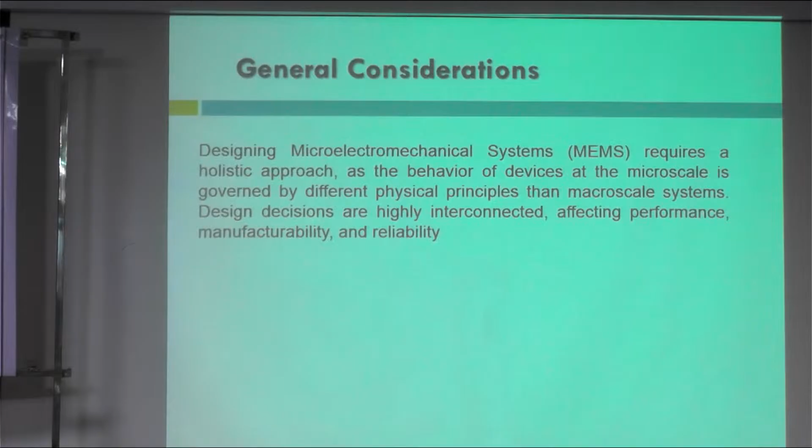As discussed previously, we know that at the micro scale or nanoscale, Newtonian mechanics does not function as we understand it at the macro scale. So if we do not consider this accordingly, we won't get the intended performance of the device, because some properties of the material change at the micro scale. We don't get the exact property as at the macro scale, so the intended device performance won't be obtained.

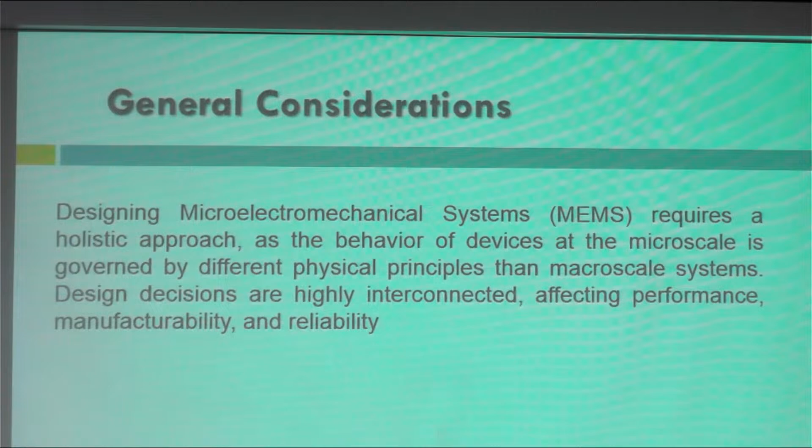So then we have to look firstly at material selection. The choice of materials fundamentally dictates a device's performance, fabrication process, and reliability. Just now we had a look into silicon itself. Silicon is the most common MEMS material due to its well-established fabrication process inherited from the semiconductor industry.

It is lightweight, has excellent mechanical properties, is elastic, has no creep below 800 degrees Celsius, and allows for integration of electronics on the same substrate. I think I've been talking about making a circuit design on top of the silicon substrate, so this is the meaning here - the integration of the electronics or electrical circuitry on the substrate itself is important.

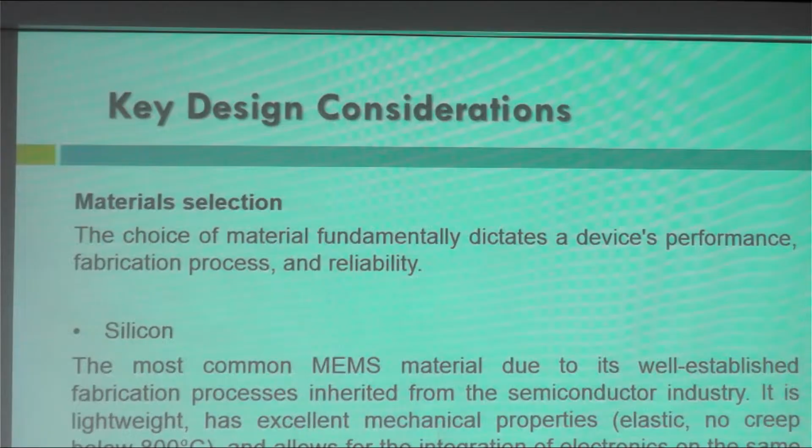We know that in other devices, in macro scale devices, we can have electric circuitry with wired winding on the device, or with an electronic circuit outside of the device, etc. But for micro scale devices, we need to layer the electrical circuit on the surface, because we want to maintain the small structure and make it accessible for the small places in our intended application.

Single silicon crystal is highly stable but anisotropic, with properties that vary based on crystal orientation. And polysilicon is a versatile material used for structural layers in surface micromachining; its properties depend on deposition condition.

For metals, used for electrical interconnects - we have discussed this - high aspect ratio structures. High aspect ratio meaning you have long-standing materials, so the width and the length are pretty much different in terms of size. That is the meaning of high aspect ratio. Properties like residual stress and adhesion are critical considerations for metal thin films.

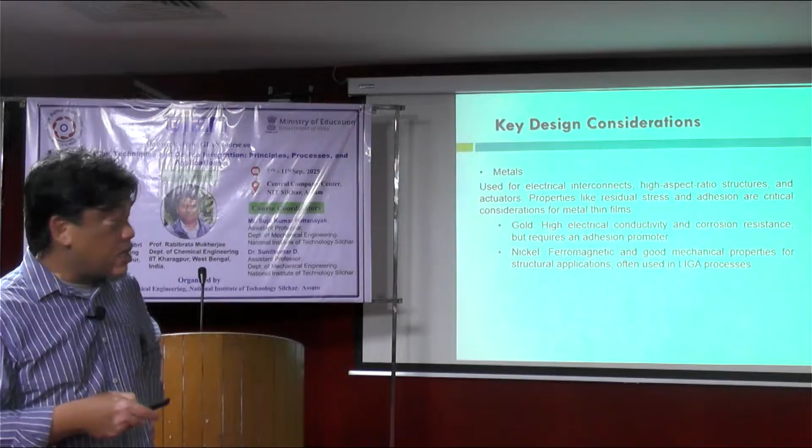For example, gold has high electrical conductivity and is corrosion resistant, but requires an adhesion promoter. We have discussed it - if we use chromium, for example, we can get high adhesion with the surface. And nickel is ferromagnetic with good mechanical properties for structural application, often used in the LIGA process.

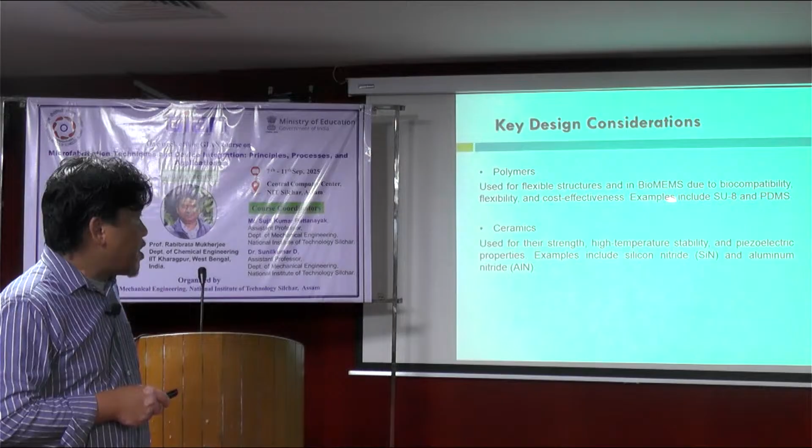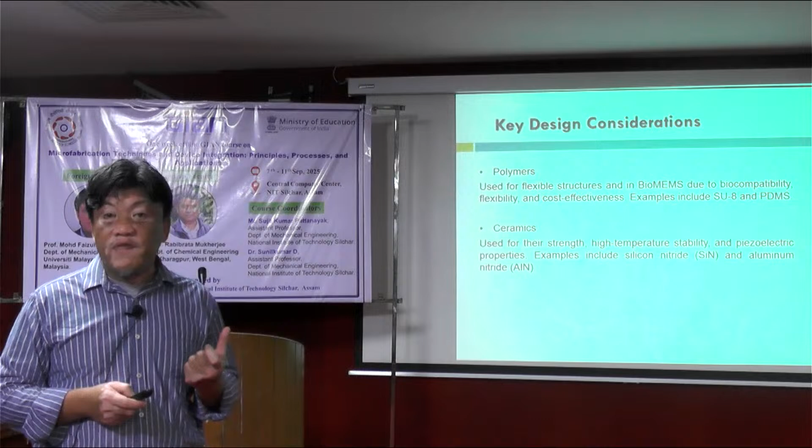Polymers are used for flexible structures and in bioMEMS due to biocompatibility, flexibility, and cost effectiveness. Examples of polymers are SU8 and PDMS - quite common materials in MEMS and bioMEMS applications. You can make a structural design using this kind of material because of its high viscosity. And ceramics are used for their strength, high temperature stability, and piezoelectric properties.

Piezoelectric properties for ceramics, for example PZT, lead zirconate titanate. Examples also include silicon nitride and aluminum nitride.

Then another consideration, which we have gone through in a previous class, is the scaling laws. Again, when we design something at the micro scale - I keep mentioning this - at the micro scale, physical phenomena scale differently with size, meaning the design cannot simply be scaled down from the macro world. If you think that at the macro world you design something, then just shrink the size and it will work accordingly as at the macro world, you are wrong, basically.

So you have to maybe alter the design and consider different materials in order to make it work, because the property will change significantly when you scale down to a different size.

Surface to volume ratio: as devices shrink, surface area dependent forces such as friction, adhesion, and surface tension become dominant over volume dependent forces like inertia, mass, and weight. This is critical for actuators, microfluidics, and heat transfer.

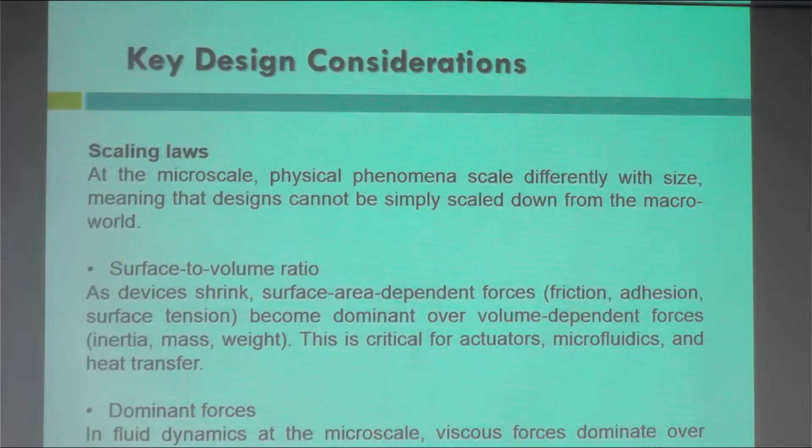For thermal properties, you need to consider heat dissipation, which is surface area dependent and becomes more efficient at smaller scale, relative to heat storage, which is volume dependent. This can influence the design of thermally actuated devices.

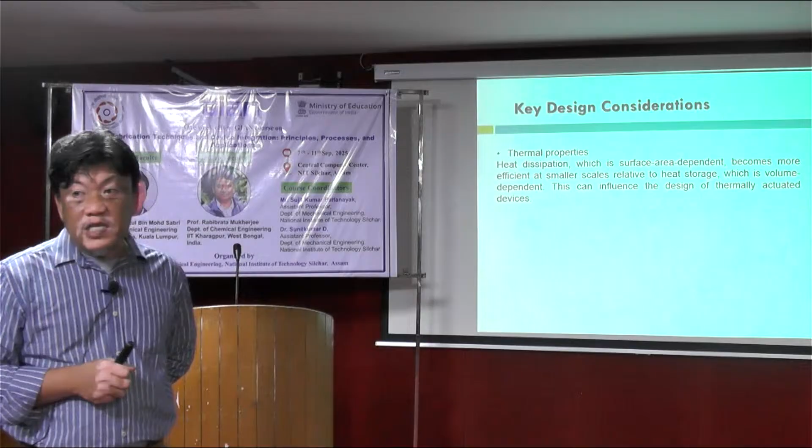For example, when I showed you yesterday the use of inkjet printing of liquid with a thermally actuated actuator - if it's very small, you can heat up the materials quite fast. So the time to deform the material at a faster rate will make it possible for you to use a high frequency inkjet printer.

But the thing is, at the small scale, you can heat up something quite fast, but the heat will also disperse quite fast as well. So that is something that needs to be considered in the design related to thermal properties of the material.

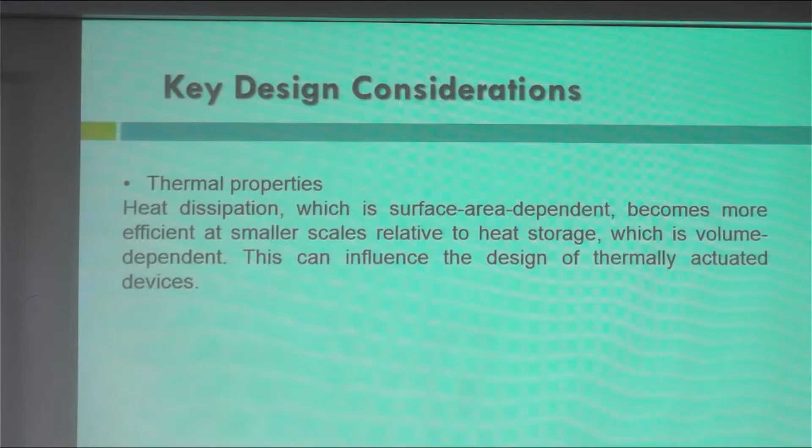Stress and stiction are major reliability challenges in MEMS that must be addressed during design. The stress to the structure is different, and stiction means it tends to attach to the surface - it sticks. You know that if something is very small, it easily sticks to the surface of a material, so stiction prevents things from moving. That is part of what you need to consider when you design a very small device or structure.

Residual stress - internal stress remaining in a film after fabrication - can cause warping, cracking, or buckling, altering device performance and reliability. As I mentioned in the previous lecture, residual stress is related to fabrication process parameters as well. If you want to reduce or mitigate residual stress, you can look into design techniques, including using corrugated beams or incorporating features that relieve stress, and process optimization, such as controlling deposition parameters.

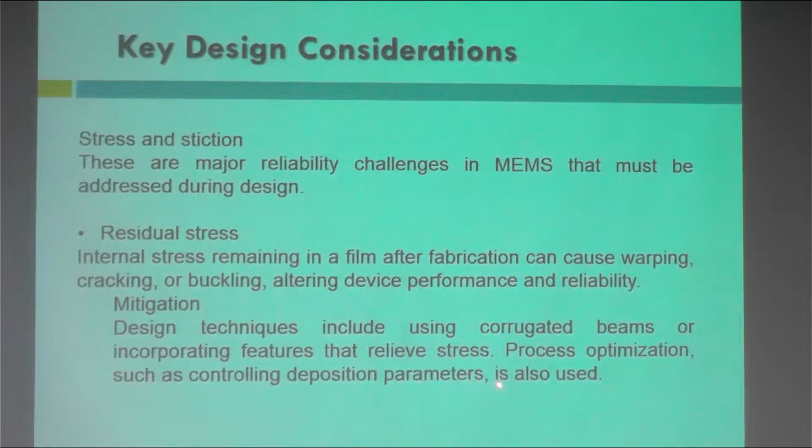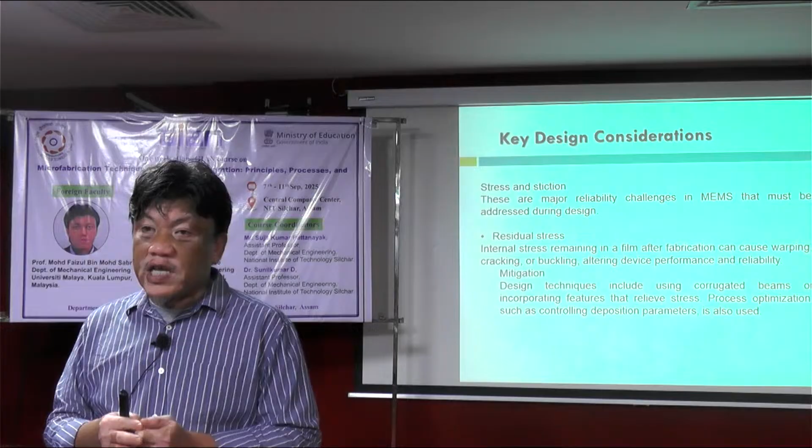As I've mentioned before, we try to establish this as a kind of recipe already, or if it's a new process, we need to identify or try to optimize the process itself in order to get low residual stress materials or an acceptable level of residual stress in the material.

Stiction is the unwanted adhesion of released microstructures to the substrate or other parts due to surface forces. It is a primary cause of device failure. When stiction happens, an actuator may not be able to release something from the surface because it's stuck, or basically glued, to the surface. That is something we have to prevent.

Mitigation strategies include surface modification, such as applying anti-stiction coatings like hydrophobic monolayers, which can reduce surface energy and adhesive forces. Surface texturing, increasing surface roughness, reduces the contact area between components and thereby reduces stiction. Mechanical design, incorporating spring-like structures or bump stops, can prevent stiction upon contact.

Let's say you have an actuator that forces something toward a certain surface, but at a certain extent, when it touches, the spring property of the material allows it to return to its original position. That is one possible strategy in terms of mechanical design.

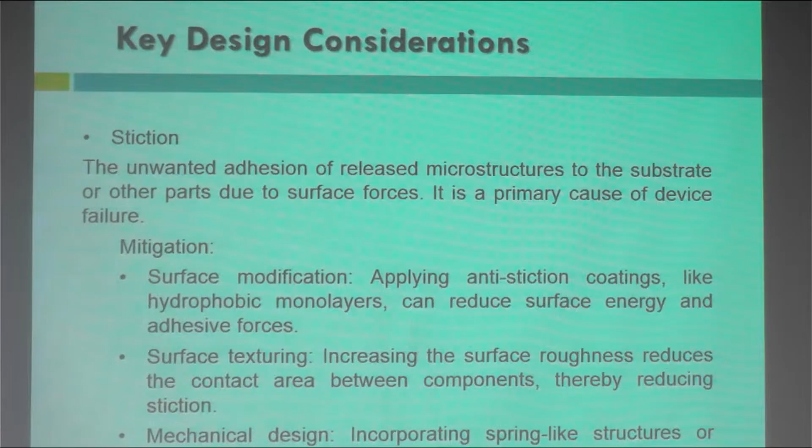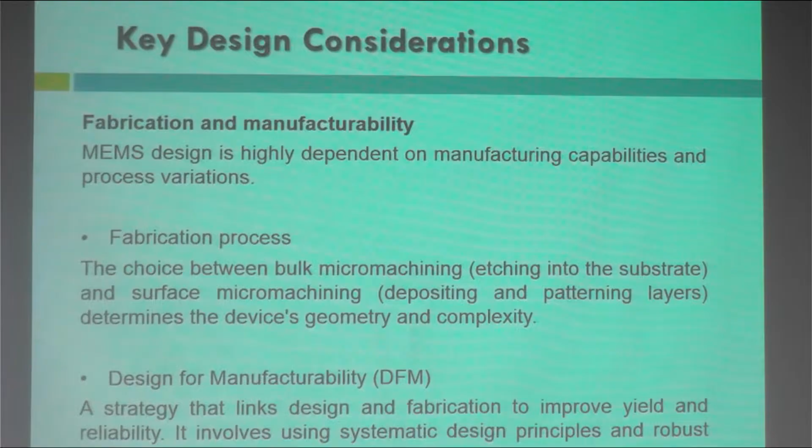And another key consideration is fabrication and manufacturability. So how easy you can fabricate, how difficult it will be if you choose certain design or certain materials. So MEMS design is highly dependent on manufacturing capabilities and process variation. So in MEMS design, basically you have a number of processes that are already established within the use of semiconductor. So you try to use these processes as far as you can in order to prevent unnecessary hassle.

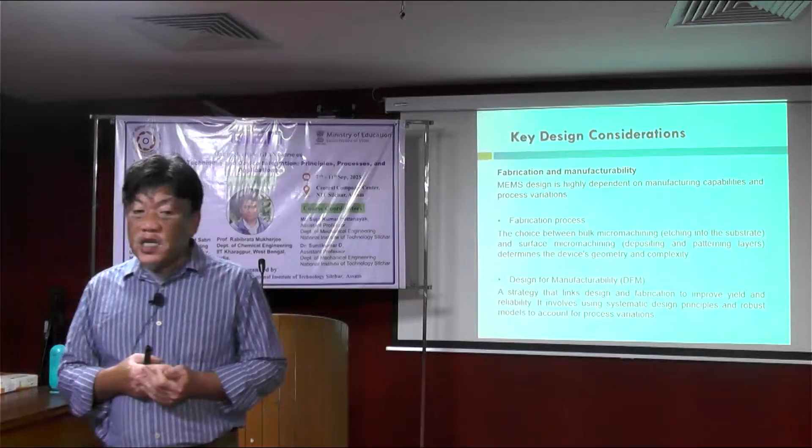In the machining process, for example, you use forces in removing materials. Let's say you do drilling, you do cutting using a lathe, for example. But for MEMS processes at the small scale, we can say that MEMS devices are fragile in comparison with macro scale devices. So you want to avoid the application of forces to the materials as much as you can. So you want to stick with the processes already established within the semiconductor process in order to make sure that you can fabricate the device successfully.

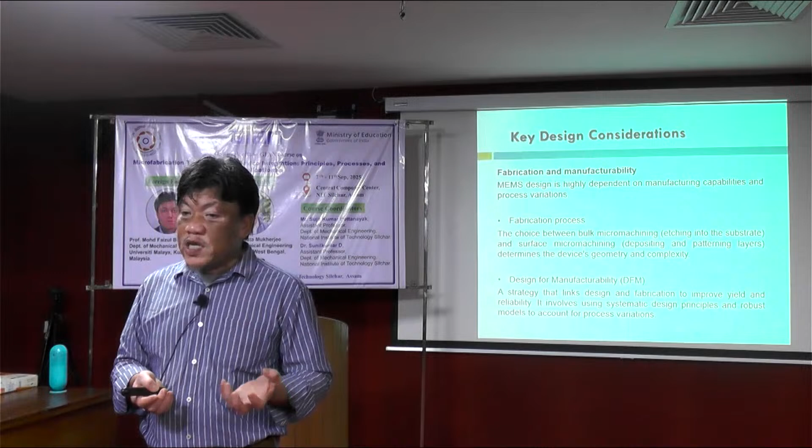So fabrication process, I mean, once we design the micro devices, we have to have in mind the process flow, what to do and how to create what kind of structure. So that will make sure that the device will go through the semiconductor process which is already established, without going into, let's say, mechanical processes of drilling, etc.

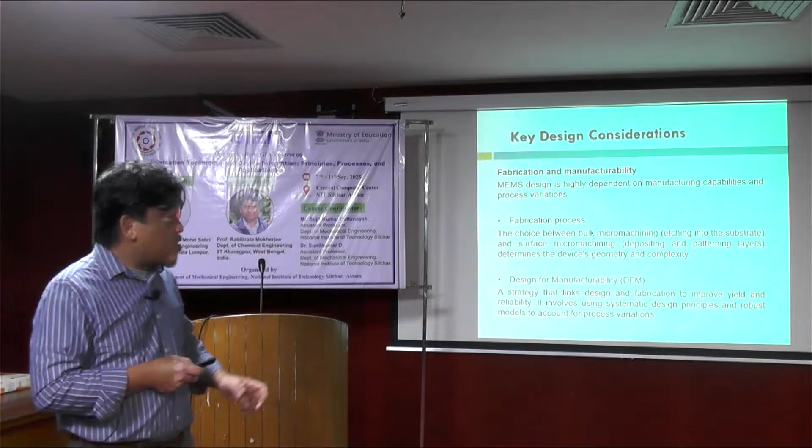So fabrication process: the choice between bulk micromachining, etching into the substrate, for example, and surface micromachining, depositing and patterning layers, determines the device geometry and complexity. Because it's small scale, it's always complex devices. You cannot simply handle the microstructure by hand, you need to handle with care. In terms of process, most of the time we need to see under the microscope because of its small structure. So the naked eye will be difficult.

So that's where you need to design accordingly, since even the structural design can be difficult for you to fabricate, basically because the origin of the MEMS process is the semiconductor process, which is surface micromachining, or 2D. So design for manufacturing is part of the consideration, a strategy that links design and fabrication to improve yield and reliability. It involves using systematic design principles and robust models to account for process variation. Sometimes certain processes do not work, and you may need to redesign your process steps in order to obtain a certain structure.

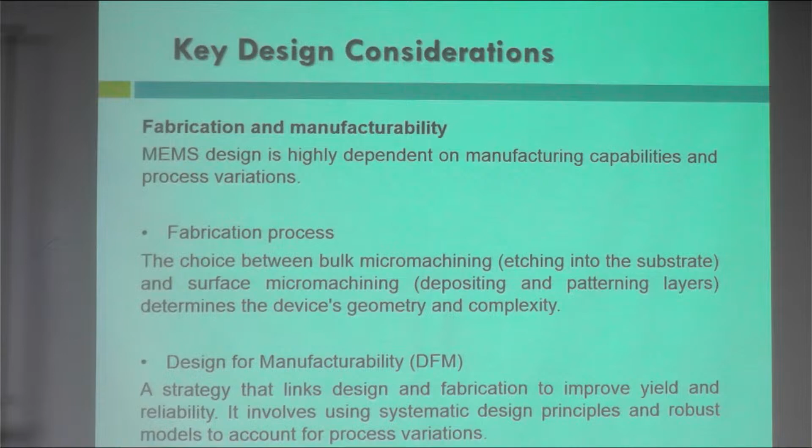So process imperfections and manufacturing tolerances, such as variation in beam thickness or photolithography alignment, can impact device performance. Designers must model these imperfections to predict their effects. By design, let's say we want to produce a 50 micrometer thickness of beam. But in the process, we have to go through masking, etc. The process parameters are sometimes not as accurate as we want, so we cannot obtain the size as intended. The 50 micrometer might be 40, less than what we want, or it might be bigger, maybe 60 micrometer thickness of the beam. So we have to consider this kind of variation when we design something.

But sometimes the process is well established. We know that if we want to obtain the size of 50 micrometer, we have to design the process flow, the masking, etc., slightly bigger. For example, if you want a final beam size of 50 micrometer, you make your photo mask design like 55 micrometer, slightly bigger. That might be something an experienced MEMS fabricator can do.

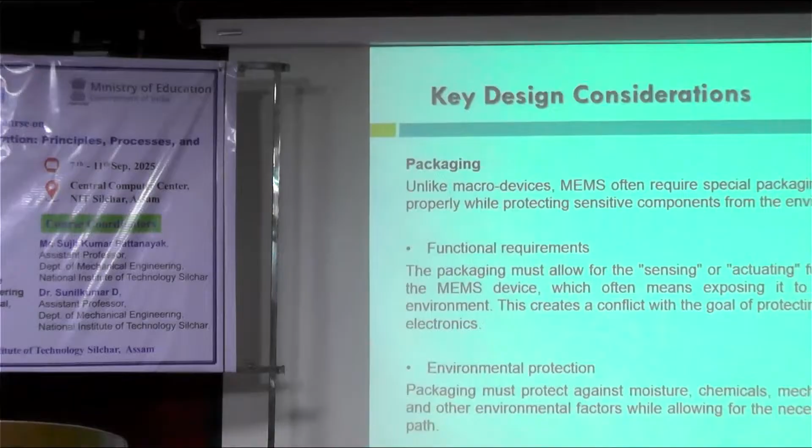You want to protect it from shock, you want to protect it from the environment, for example. I mean, to protect it from even dust, you need to have proper packaging. Functional requirement: the packaging must allow for the sensing or actuating functionality of the MEMS device, which often means exposing it to the external environment. This creates a conflict with the goal of protecting the internal electronics. So this kind of trade-off you have to consider.

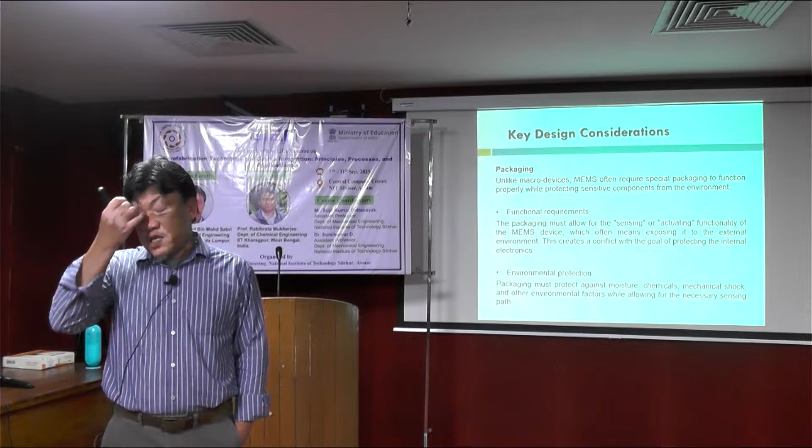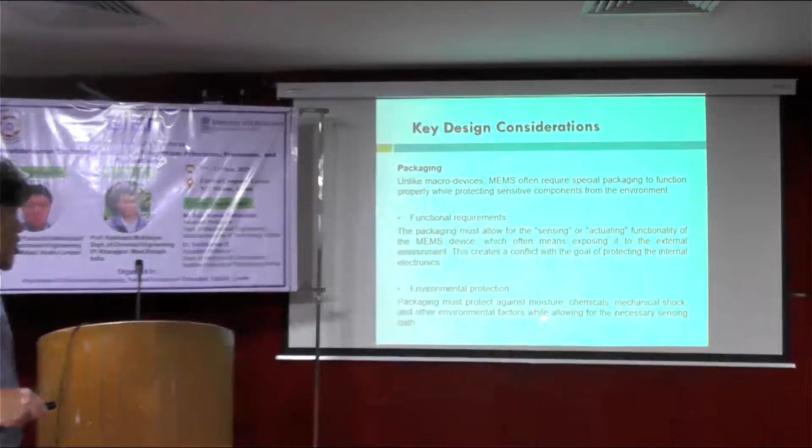You want it to function. Let's say your MEMS speaker, for example: some parts need to be exposed so that it will behave like a speaker and you can hear the voice, but to a certain extent some of the small parts you need to protect with the packaging. So that kind of thing needs to be considered. And environmental protection: packaging must protect against moisture, chemicals, mechanical shock, and other environmental factors while allowing for the necessary sensing path.

Another design consideration is the material properties. We have been talking about this as well. Coefficient of thermal expansion: a mismatch between the MEMS die and package material can induce significant mechanical stress and affect performance. Material selection for packaging must minimize this mismatch. So you have different materials. Let's say your packaging is something like polymer. Polymer does not expand that much. And some parts of your MEMS device might use certain metals as the structure, for example. The expansion of the metals is higher with temperature.

So this mismatch of thermal expansion will create stress to the packaging and to the microstructure of the device itself. So this kind of material mismatch in terms of thermal properties needs to be considered: how you can release it or make sure it won't break when it happens, or operate in a controlled environment. And package types: options range from standard, cost-effective, full mold packages for consumer products to more stable, higher performance cavity or hermetic packages.

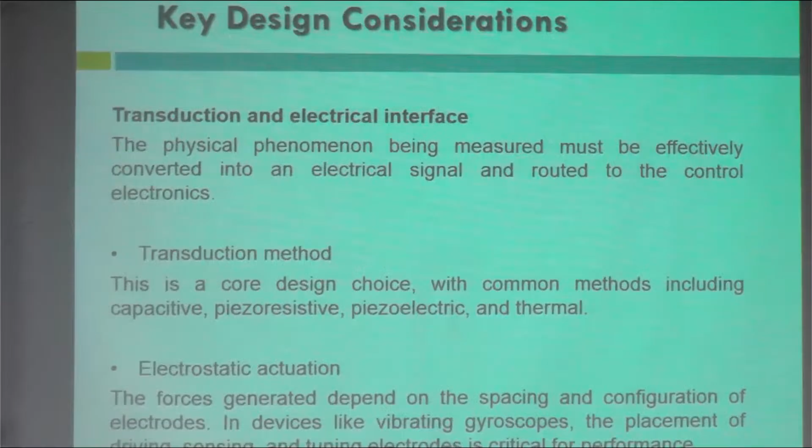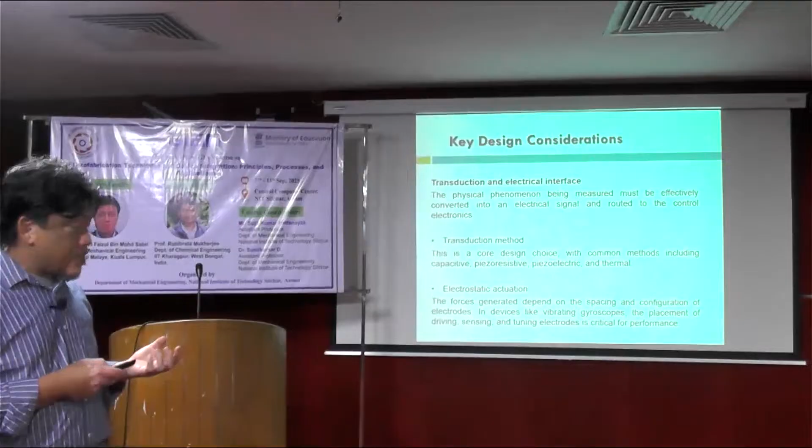Then another key consideration for the design is the actuator itself. The transduction and electrical interface: the physical phenomenon being measured must be effectively converted into an electrical signal and routed to the control electronics. So basically in a MEMS device you need to have things that move, depending on the application. If it's a sensor, you need a sensing part that can change its property or respond to what you want to sense, whether it's heat, light, or humidity. Then you have to consider the phenomena and the electronics accordingly. For example, transduction method is a core design choice, with common methods including capacitive, piezoresistive, piezoelectric, and thermal.

So the transducer or actuator normally used in MEMS is the capacitive sensor or capacitive transducer. It can work both ways, depending on the application, whether you want to use capacitive as a sensor or as an actuator. If you want to move something, it becomes an actuator. But if you want to sense a movement with capacitive, you can measure how much is moved. It's the same with piezoresistive, piezoelectric, and thermal.

We know that piezoelectric has a sensing property. When you provide electrical current to the piezoelectric material, you get expansion, so the material expands and becomes an actuator. But if you apply strain to the material, you get electricity for sensing, because it induces electricity. It's the same with thermal.

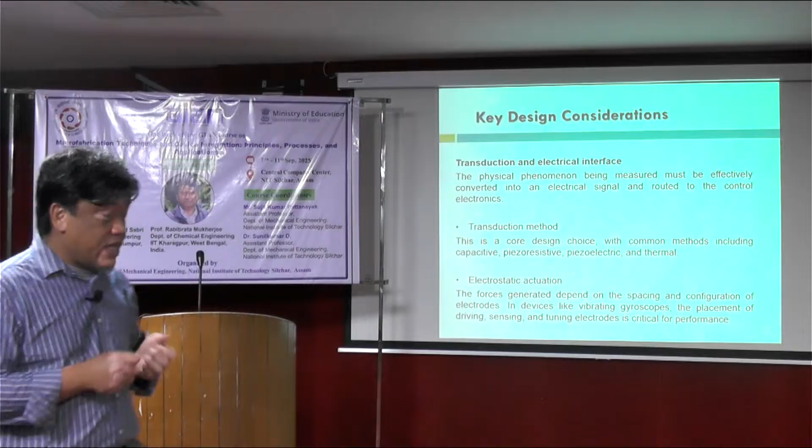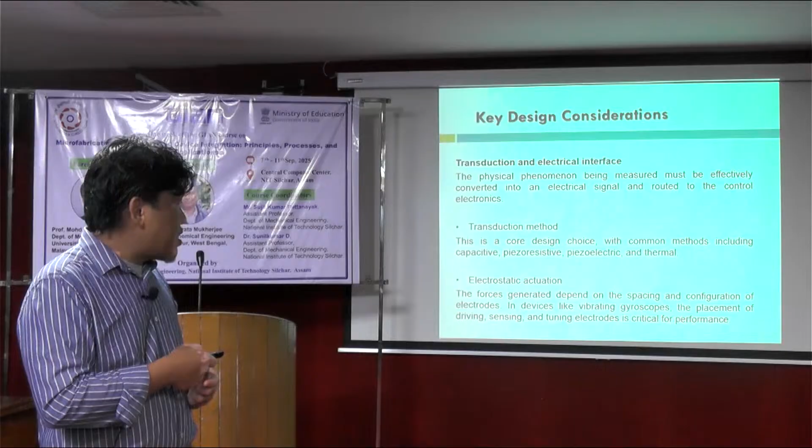Electrostatic actuation: the forces generated depend on the spacing and configuration of electrodes. In devices like a vibrating gyroscope, the placement of driving, sensing, and tuning electrodes is critical for performance. I think we had a look yesterday at electrostatic actuation and some examples of the comb drive actuator, right? A comb drive is basically an electrostatic actuator. With a comb drive you can have different configurations for getting the electrostatic forces. If you integrate more comb electrodes, you can get higher forces.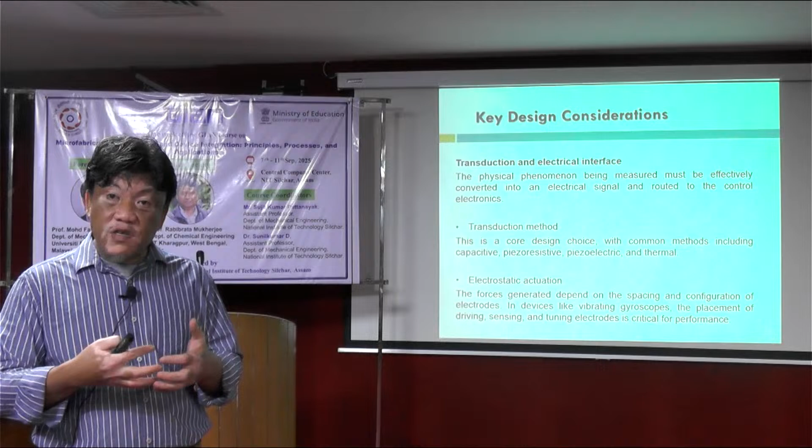And signal integrity: the electrical interface must be designed to minimize noise and interference, especially for highly sensitive analog and digital MEMS signals.

So this is an example of a design consideration. We had a look at the general design considerations for micro devices; next is the example. So let's say you want to have this kind of pressure sensor. You have a layer of thin film here. This is a bulk substrate, kind of anchor. So you have the change of pressure from here, from the bottom.

So when the pressure changes, this thin layer is the place where you want to sense what has changed. So with the change, the deformation of this thin film, you want to have a signal. Basically, you can use piezoresistive or thermal or anything related. Let's say you use piezoelectric, for example: the deformation of this layer will cause some electric current to flow. Then, depending on the calibration, you can sense the pressure, what happened inside if the pressure changes.

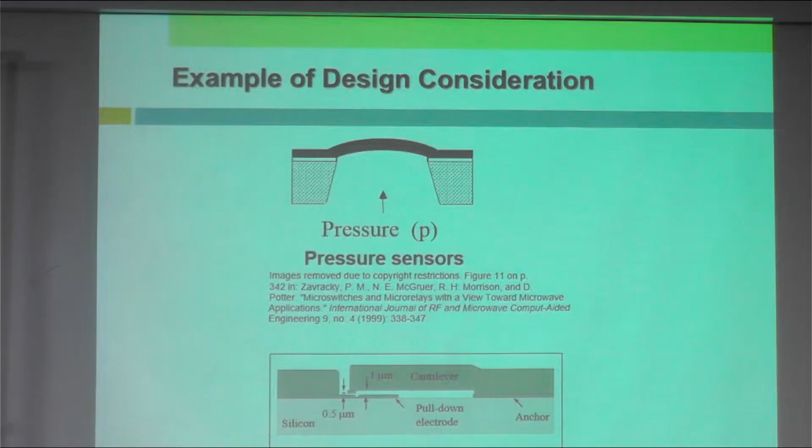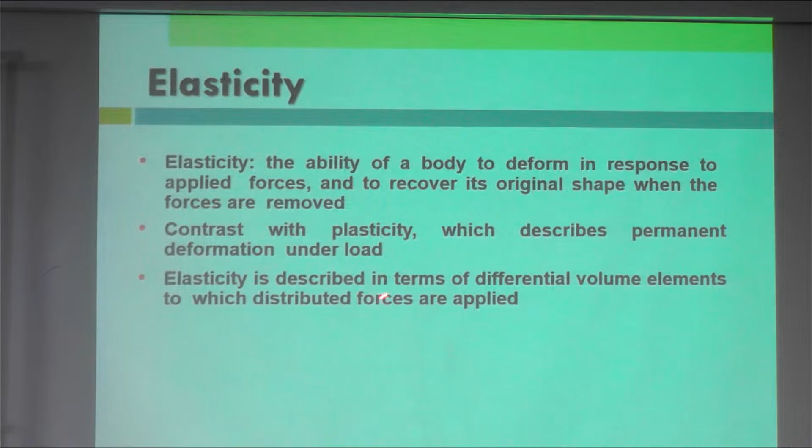And contrast this with plasticity, which describes permanent deformation under load. Beyond the elastic deformation, some materials will experience plasticity. When you go into the plastic region, the shape won't come back to its original shape. Elasticity is described in terms of differential volume elements to which distributed forces are applied.

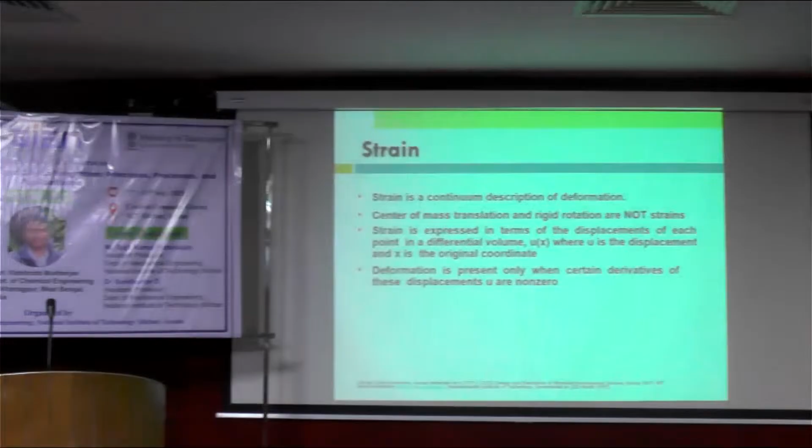So we have to look into the strain. Strain is a continuum description of deformation, and center of mass translation and rigid rotation are not strain. Strain is expressed in terms of the displacement of each point in a differential volume, where u is the displacement and x is the original coordinate. Deformation is present only when certain derivatives of this displacement u are non-zero.

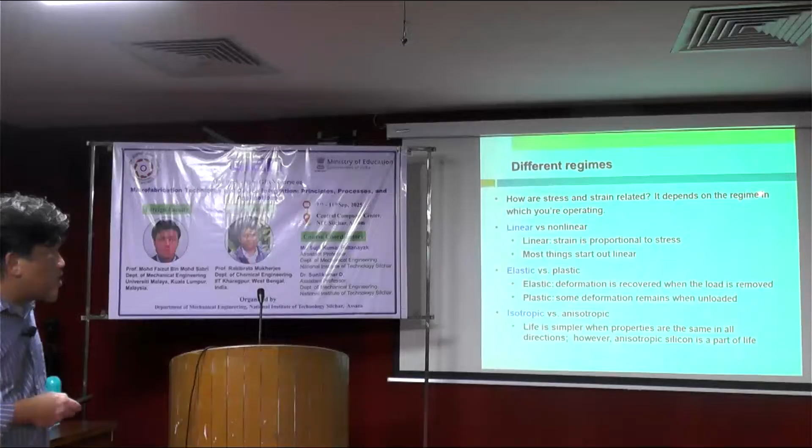So how are stress and strain related? It depends on the regime in which you are operating. Linear versus non-linear: in the linear regime, strain is proportional to stress, and most things start out linear. Elastic versus plastic: elastic means the deformation is recovered when the load is removed, and plastic means some deformation remains when unloaded. So if plastic deformation happens, the device won't work as intended.

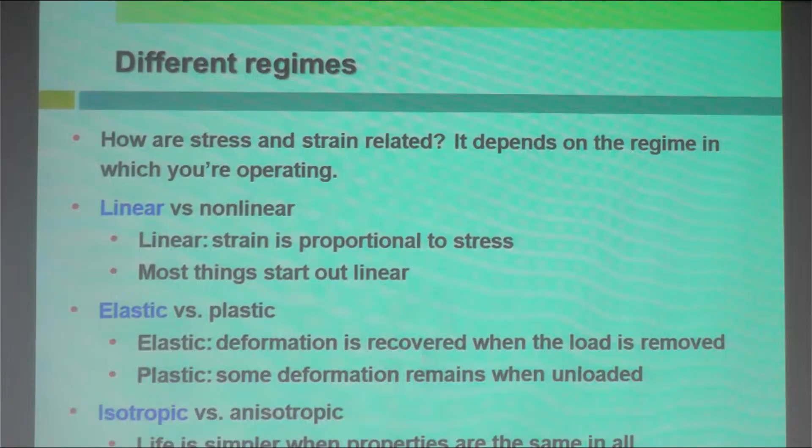Isotropic versus anisotropic. Life is simpler when properties are the same in all directions. However, anisotropic silicon is part of life, because single crystal silicon has a fixed orientation, so different sides of the silicon will give you different properties. If you want to etch the silicon into shape, you have to consider the orientation of the crystal. That's where identification of the crystal orientation from the beginning will be crucial.

Okay, thin film stress. Thin film on a substrate can have residual stress, whether intrinsic stress or thermal stress. So if you want to deposit thin film, let's say you have a substrate and deposit thin film with a certain process, the addition of this thin film on this substrate will have a certain stress, which we call intrinsic stress. It's due to the process, as I mentioned before. It's mostly described as a plane stress.

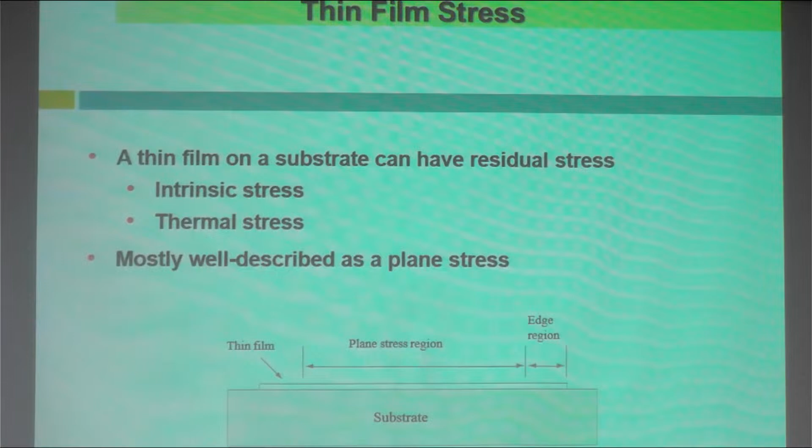So especially at the edge, if stress happens, you will get warpage at the edge of the thin film. So that is what happens with intrinsic stress. What we have just talked about is elastic strain: strain caused by loading returns to the undeformed configuration when the load is removed, and is described by the isotropic equations of linear elasticity. And there are other kinds of strain as well.

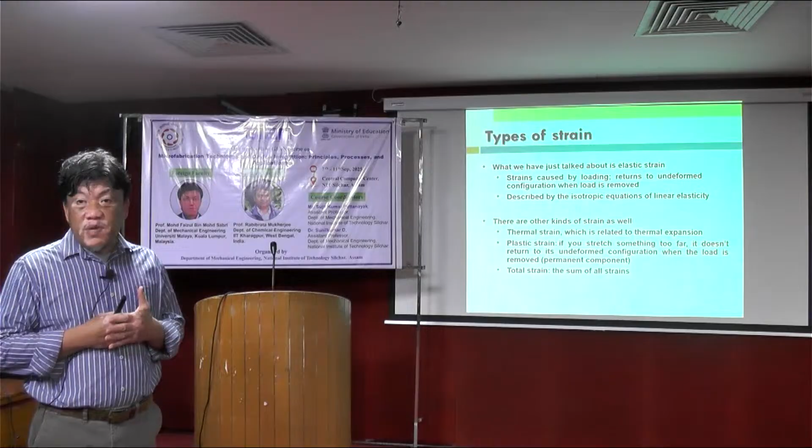Thermal strain, which is related to thermal expansion. When thermal expansion happens, some materials will have a thermal strain where they don't go back to the original position or original shape. Plastic strain: if you stretch something too far, it doesn't return to its undeformed configuration when the load is removed. And total strain is the sum of all these strains.

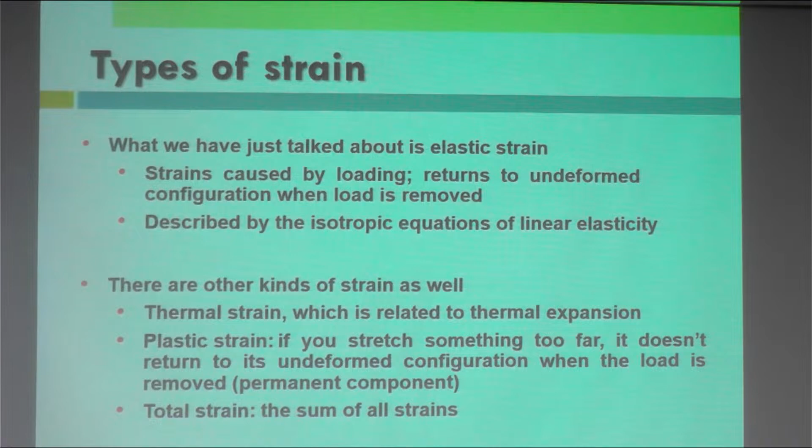So some devices experience the total strain. You have a lot of strain, the intrinsic strain, the thermal strain, etc. Then it will affect the performance of the device as well. And thermally induced residual stress: if a thin film is adhered to a substrate, a mismatch of thermal expansion coefficient between film and substrate can lead to stress in the film. So this we have discussed before as well.

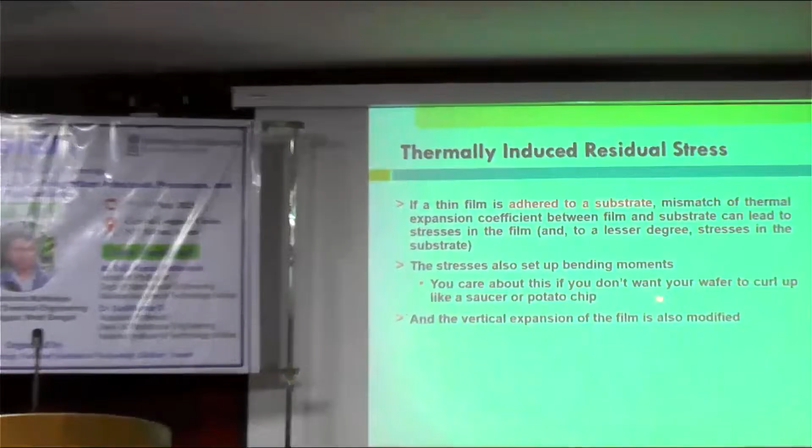You have a different material, and of course a different coefficient of thermal expansion. So if the device experiences heat, the expansion is different between your substrate and your deposited thin film, and thermal strain will happen. The mismatch in the coefficient of thermal expansion will cause this. The stress also sets up bending moments. You care about this if you don't want your wafer to curl up like a saucer or potato chips.

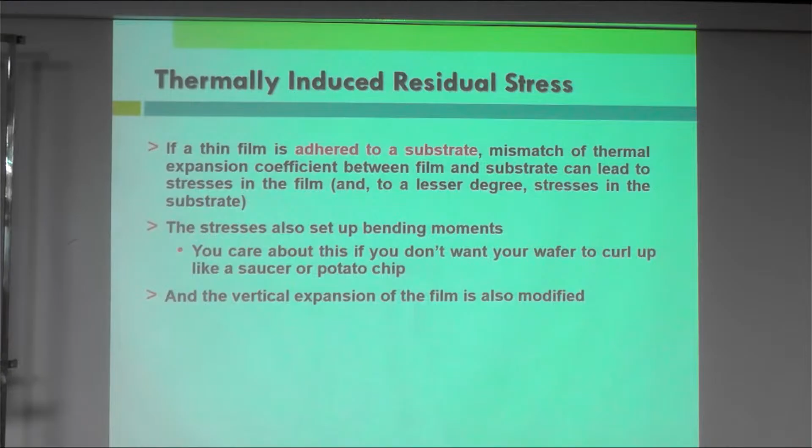Sometimes, because you make it into a thin film, even with strong adhesion, the strain of your deposited film might cause warpage or bending of the surface of your material. That is what quite commonly happens if you don't really take care of this in the beginning. And the vertical expansion of the film is also modified.

So intrinsic residual stress: any thin film residual stress that cannot be explained by thermal expansion mismatch is called intrinsic stress. A source of intrinsic stress is deposition far from equilibrium, meaning when you deposit the thin film, it's not in the equilibrium state. Secondary grain growth can modify stress as well. You grow the material layer by layer, but the secondary growth, for example the next growth, modifies the stress of the

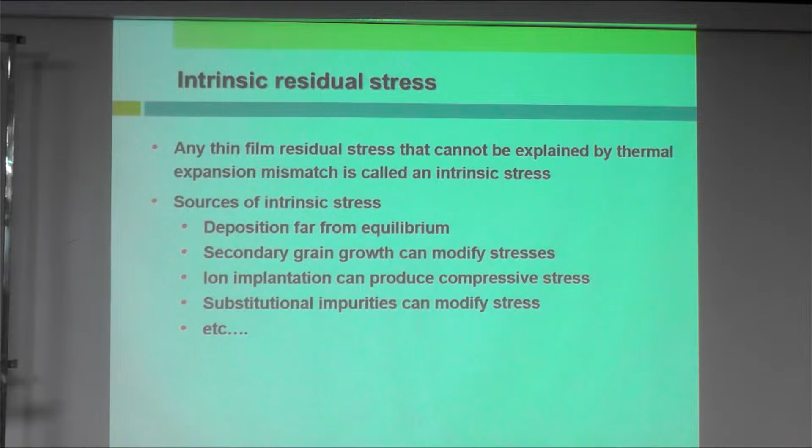thin film. Ion implantation can produce compressive stress as well, and substitutional impurities can modify stress. It's not that easy to control the purity. Sometimes we have a different element included in the material, and even with a small amount, it can change the properties of the material.

Then we talk about plastic deformation as well. If the material experiences deformation beyond the elastic deformation, it will go to the plastic region, then it will not come back to the original shape. Beyond the yield point, a plastic material develops a permanent set, and this is exploited in the bending and stamping of metals, basically. It can be something useful, but in the device itself, it depends on the device's intended performance and capability.

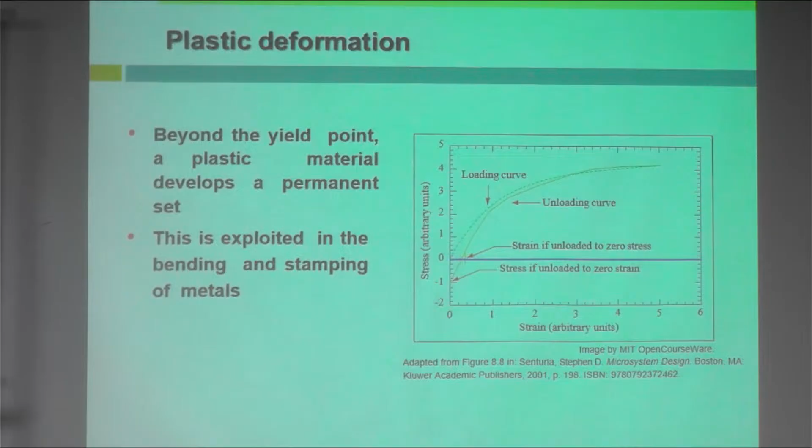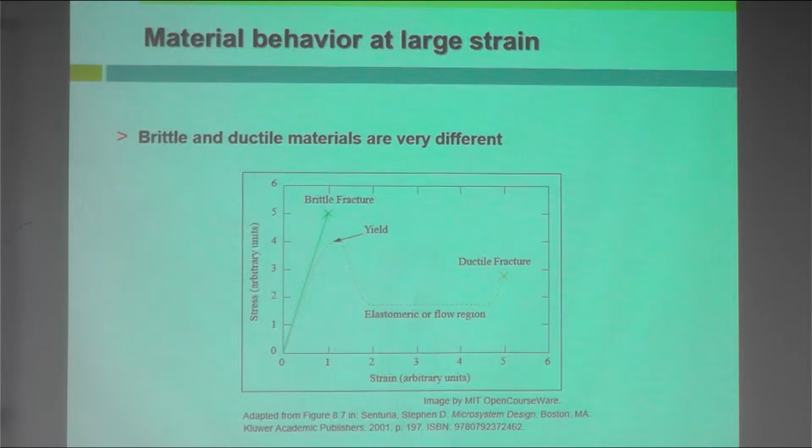And brittle and ductile materials. For example, silicon is basically brittle. It's hard and brittle, so you don't want to drop the silicon because it will break like glass. If it's brittle, you have to consider the brittleness of the material and its intended application. And if it's ductile, you have to look into what the region for plastic deformation will be.

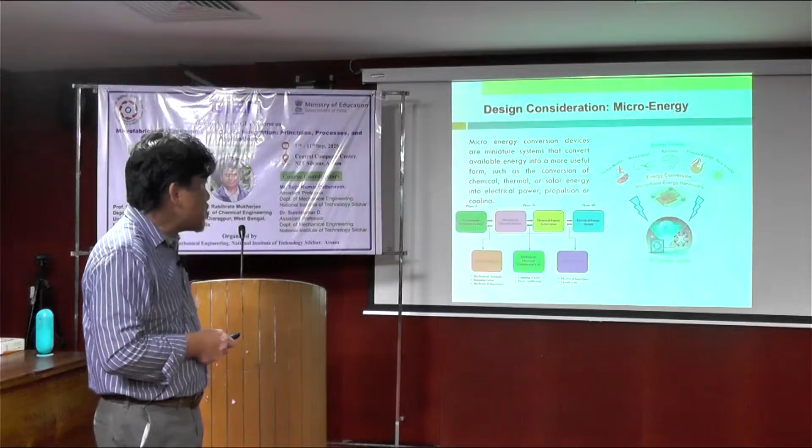And I would like to share an example of the design considerations of a device, which is called micro energy scavenging. In this device design, we have to consider a few things at the early stage, both for the process itself and for the intended application.

For the intended application. And what I'm going to share is a device which is called microenergy scavenging, a microenergy conversion device, a miniature system that converts available energy into a more useful form, such as the conversion of chemical, thermal, or solar energy into electrical power, propulsion, or cooling. We can have a lot of this kind of device at the small scale.

People try to design this kind of energy scavenging device using piezoelectrics, where you have a strain or you can have a vibration, then you convert it into electricity. So it can be as small as nanowatt or nanoampere, but the thing is with different energy sources. So in piezoelectric, for example, it can be the strain or vibration or deformation happening by any means that can deform or provide strain to the materials.

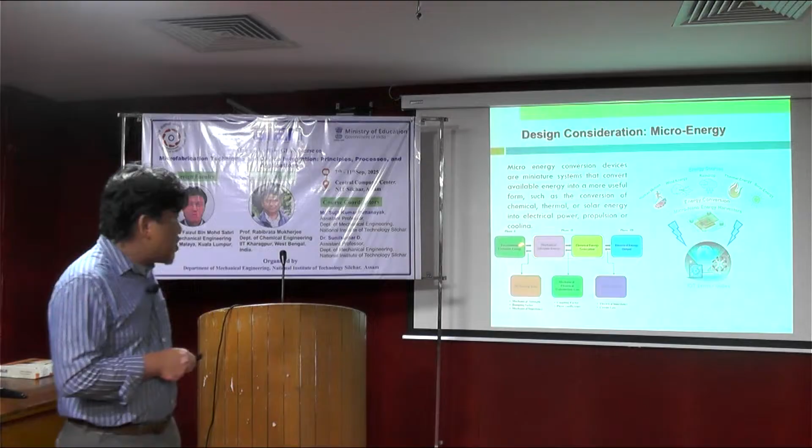Okay, and the source can be from environmental excitation, mechanical vibration, as I mentioned, and you convert it into electrical energy, or the other way around. Then the electrical energy output is actually what you want in terms of energy scavenging. And of course, in the conversion, you need to consider the amount of energy that can be harvested, and how much you can convert into useful energy or electricity.

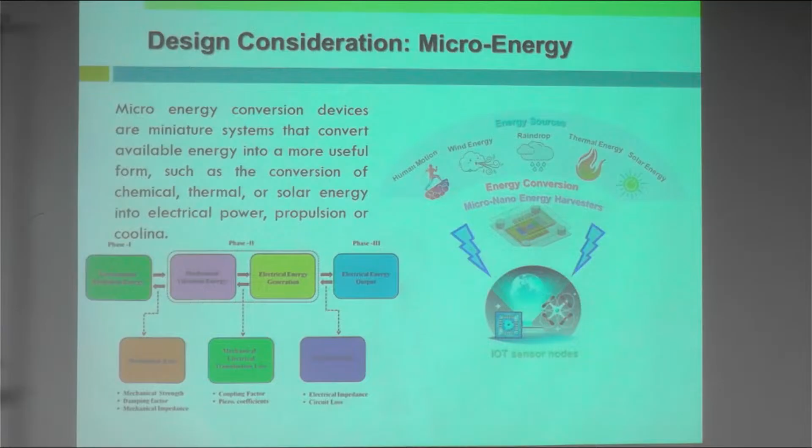So here, the objective of this device is to develop a process for fabrication of microarrays directly on flexible electrospun beta phase polyvinylidene fluoride PVDF film. So why is the objective important? Because you want to determine your device size, device structure, device materials, etc. So here you see it is with a microarray. So why a microarray? Because this is about a small device.

So you use PVDF, and the conversion of PVDF into useful energy is very minimal, very small. Then with a microarray, you can combine them like an arrangement of batteries in series, so that you can get higher power output. And flexible electrospun beta phase is basically the best phase of PVDF in terms of producing electricity.

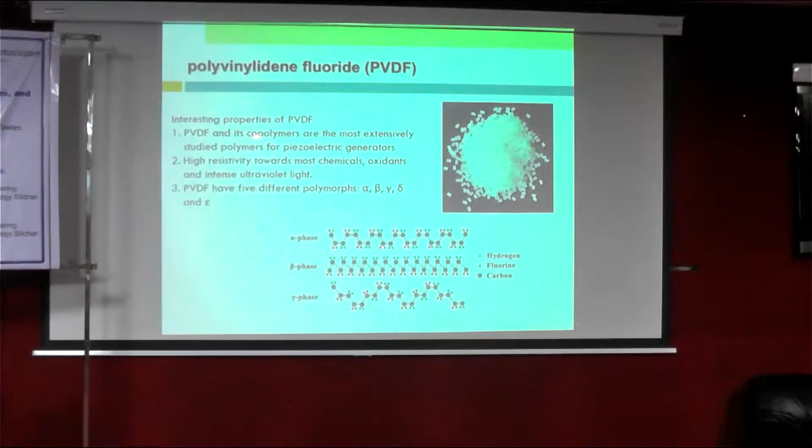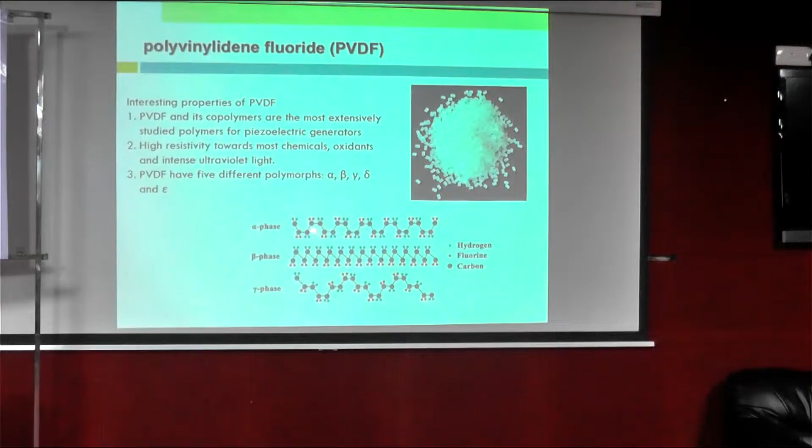So the material used is PVDF, polyvinylidene fluoride. PVDF and its copolymers are the most extensively studied polymers for piezoelectric generators, with high resistivity towards most chemicals. Basically, it is quite inert to oxidants and intense ultraviolet light. And PVDF has 5 different polymorphs, which are alpha, beta, gamma, delta, and epsilon. So you have different phases of PVDF, alpha phase, beta phase here, and gamma phase. Then with different phases, basically you have different properties.

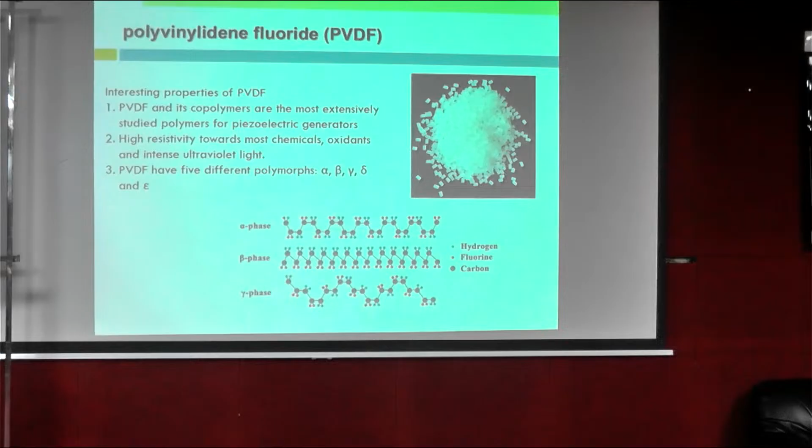So the property of the phases is important here, because you want to use it for energy scavenging or to convert the heat into electricity. So you want to have the best property for heat and for the strain, because it's about a pyroelectric property. The most influential and typical phase is the alpha phase, where the axis of the chain and the dipole components are anti-parallel, thus neutralizing each other. And the naturally occurring alpha phase is categorized as non-polar and non-piezoelectric. So we want to have a piezoelectric property, so we basically cannot use the alpha phase.

And in the beta phase, the dipole components are parallel, hence resulting in greater spontaneous polarization. And this type of conformation displays pronounced ferroelectric and piezoelectric properties. So basically, that is the reason that we choose a beta phase PVDF in terms of the selection of the material for this energy scavenging device.

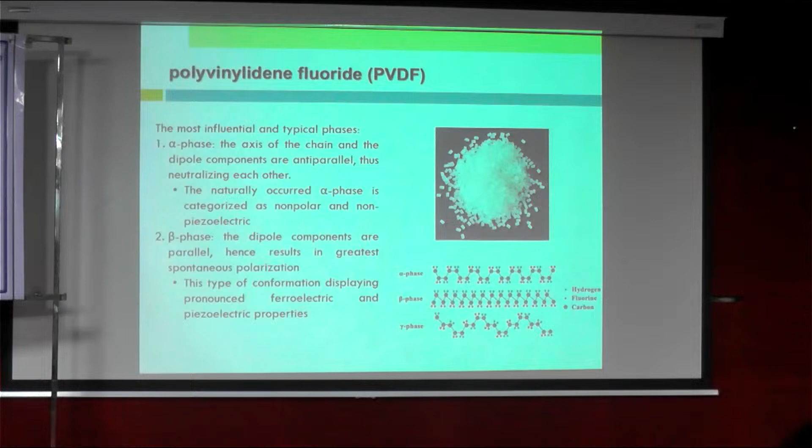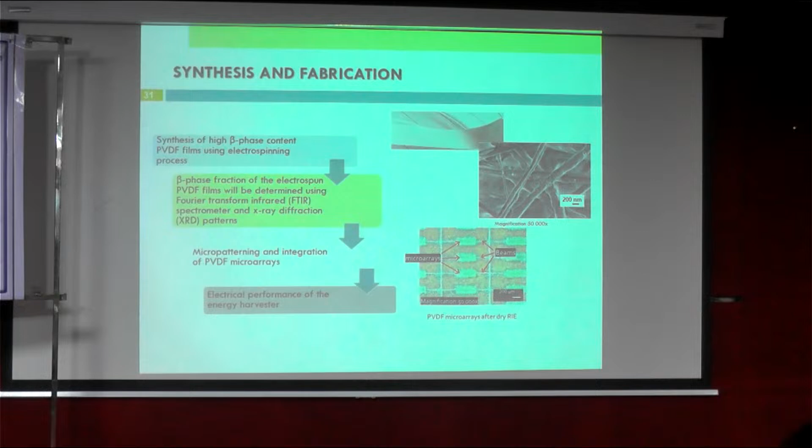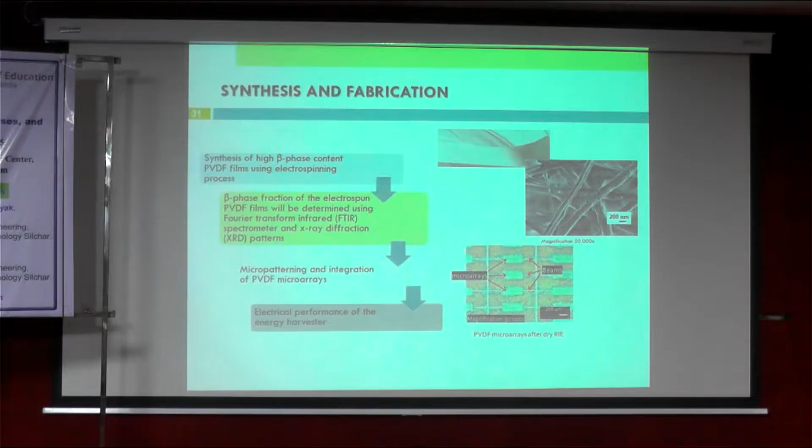I'm not sure if you are familiar with electrospinning. Electrospinning is a process where you apply a high potential between two terminals. You put your liquid PVDF in a syringe, control the shearing forces and applied pressure, then control the potential between these two terminals at high voltage. Then you can have a strand of nano strand pulled from the syringe. That is the process of electrospinning.

With this process we'll be able to produce high beta phase PVDF. As you are aware, piezoelectric needs to be poled, the poling process needs to be done. But in electrospinning, the poling can be omitted because the high potential process itself is already a process of poling.

So beta phase fraction of the electrospun PVDF film will be determined using FTIR, etc., to confirm the properties, and then with micro patterning and integration of PVDF microarrays and electrical performance of the energy harvester.

So this is the PVDF string or thread, this is the film basically. If you zoom into this film you can see this kind of thread. Then you can make it into microarrays as intended, all connected with a metal circuit. This has been produced using reactive ion etching to make into a micro scale device.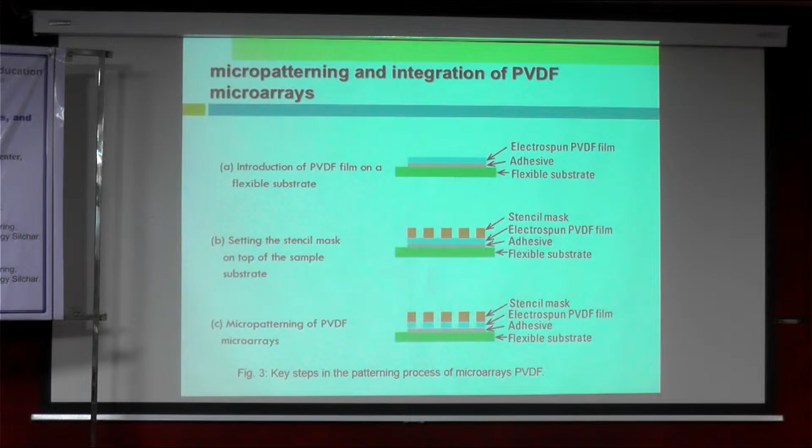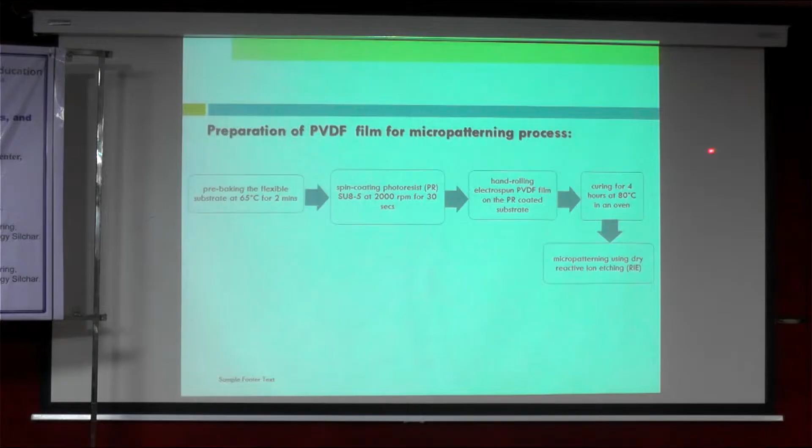The process in detail is quite normal in terms of micro device design: pre-baking of the flexible substrate at 65 degrees Celsius for 2 minutes, then spin coating photoresist, as mentioned before. We will look into photoresist properties later on. Then hand rolling electrospun PVDF on the substrate, curing at 80 degrees Celsius, and micro-patterning using reactive ion etching.

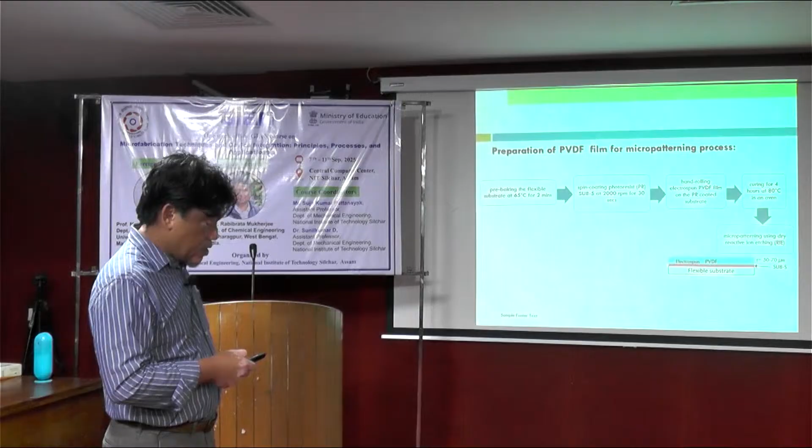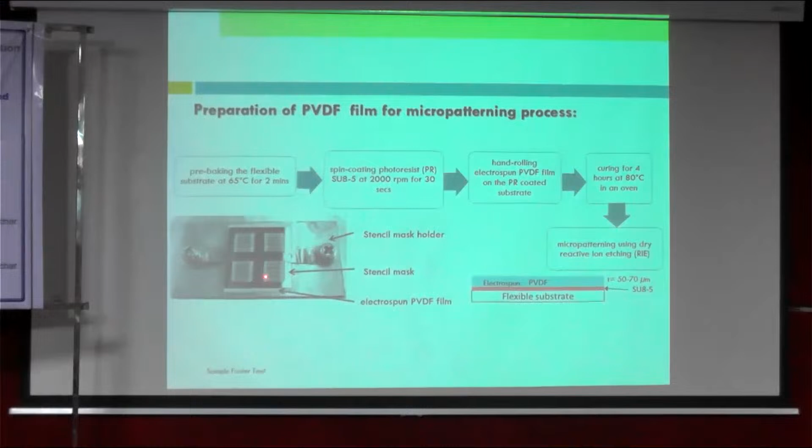So this is the substrate, then you get this kind of mask, basically the stencil mask. This is the electrospun PVDF at the bottom of this mask. This is where you try to transfer the pattern of the stencil mask to the substrate. Then you do the reactive ion etching.

Then this is the result: the clamping here to hold the stencil mask, the spacer you need, then electrospun PVDF, adhesive, then patterning of the dry RIE with a gas flow rate of oxygen and pressure, RF power, etc.

You do the etching of this PVDF membrane. These are quite important parameters for the process, because depending on the material you are dealing with, the process might have a different recipe.

So this is the actual photo, zoomed, with a 200 micrometer width of PVDF. Just imagine, yesterday we talked about our hair being about 50 to 70 micrometers, so this is just slightly bigger, 200 micrometers.

Then you do the testing, because this is a hybrid system of piezoelectric and pyroelectric. Piezoelectric, as mentioned, you can harvest electricity by providing strain to the system, or pyroelectric is about heat. You have a thermal fluctuation, then you can get electricity.

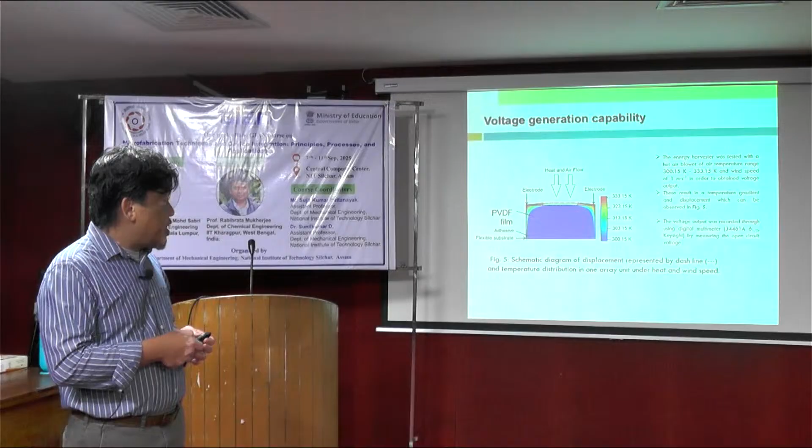Because of the nature of PVDF at beta phase, you can have both piezoelectric and pyroelectric. If you blow hot air to the system, you can harvest the heat from the hot air, and also the flow of the air can provide strain to the material itself, which gives a piezoelectric output. So beta phase of the material here.

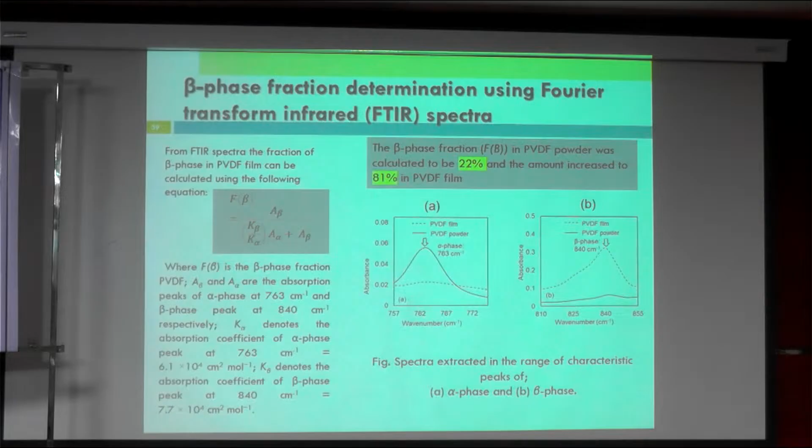Prior to the experiment, you have to calculate basically whether it will work or not, hypothetically, and do some simulation of the micro device.

The PVDF film at the beta phase is here, as detected by FTIR.

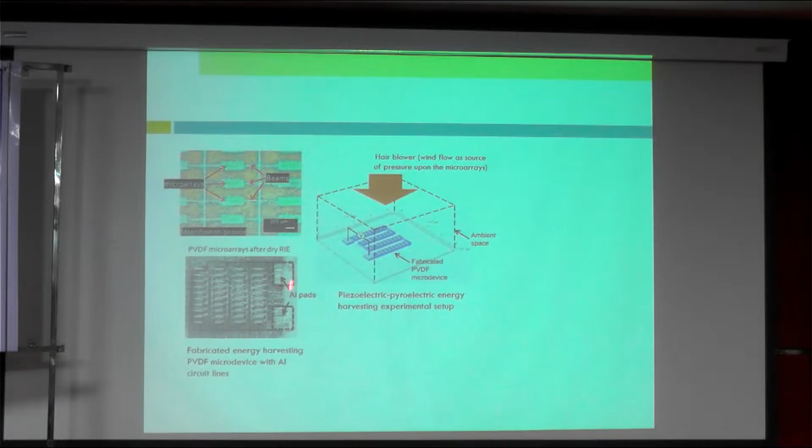This shows how you can package the system and the setup in terms of this pad. This is aluminum pads for the electrical conductivity, for you to harvest electricity from the system.

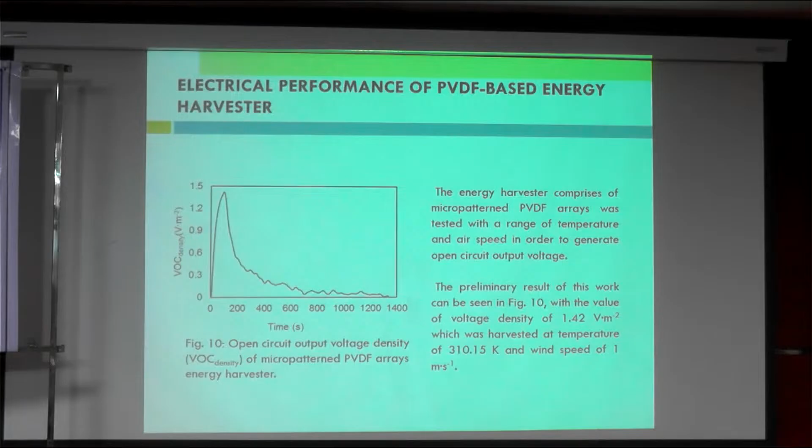What we designed is a system that can harvest electricity from hot air. So when you blow hot air to this microsystem, you can harvest some electricity that is good enough to power certain sensors or an IoT node.

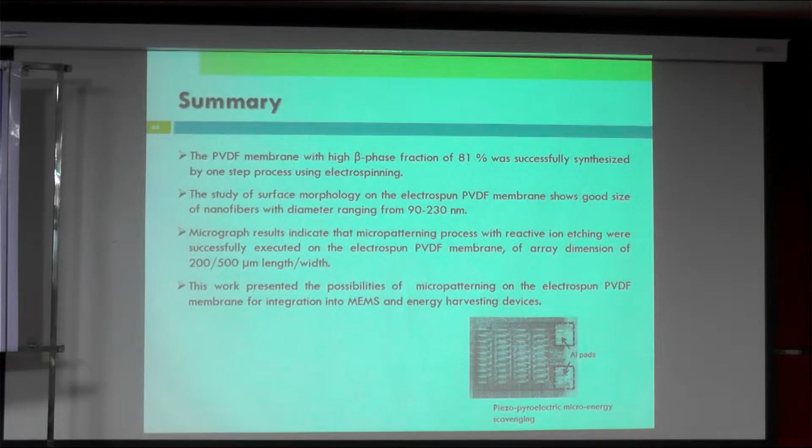Okay, I think time is up.

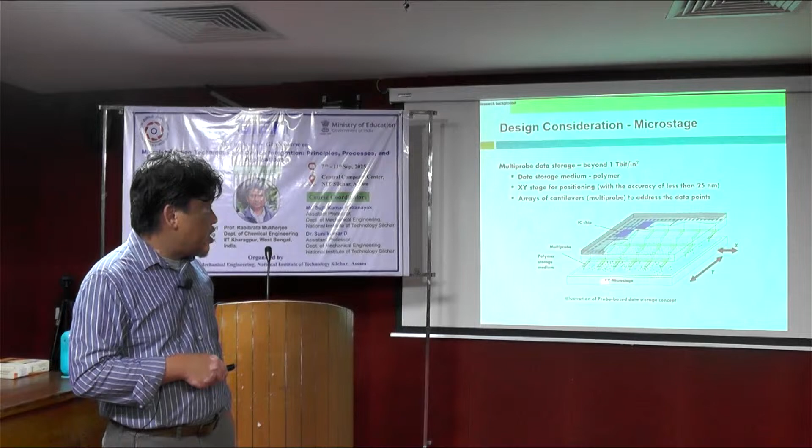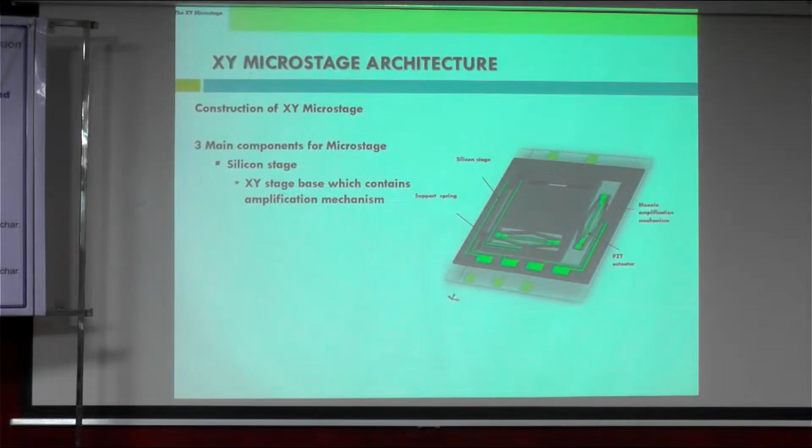Another consideration in terms of design is for the multi-probe, which I will share later as a case study. Just to provide some indication of the design consideration here: to design this kind of probe, we have to consider the capability of making the movement, and what kind of materials should be considered from the beginning. If you want this as a substrate, what will be the good substrate, and what will be the good process and electrical conducting material as well. I think it's better for me to consider it later.